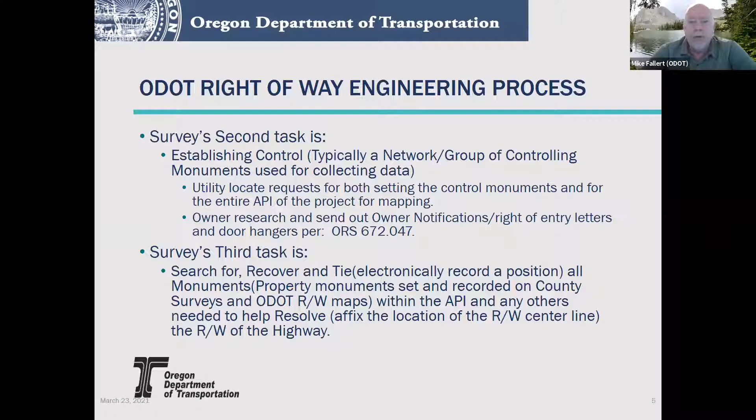So the crews in the field, which are very critical to our process here, they go out and they search and recover or tie, electronically record the position of all the monuments, property monuments, set and recorded with county surveys, ODOT maps. All this was within the API or outside of the API, whatever it takes that's needed to resolve the location of the highway center line. And then they're also collecting all this topography data, which moves on to the fourth task.

So while the topography data is being collected and the crews are out there doing that, usually have them do the monument stuff first if we can, because then the project surveyor can start working on all the information trying to resolve the right-of-way. Resolving the right-of-way is not always simple. There's tons of research, hours of drafting property lines, looking at every single deed and description, recorded surveys, county surveys, and the old right-of-way maps.

And so you try to put together all the information. You physically put all this together and use the monuments, physical features of the road, and then you have to also look for blunders in older data, because we may be retracing a center line that's 50 years old or something. But once that's completed and we've got a best fit resolution of the right-of-way center line, then we establish and lay out the existing right-of-way lines. And we draft all that up and put that together with all the deeds and maps and records of evidence.

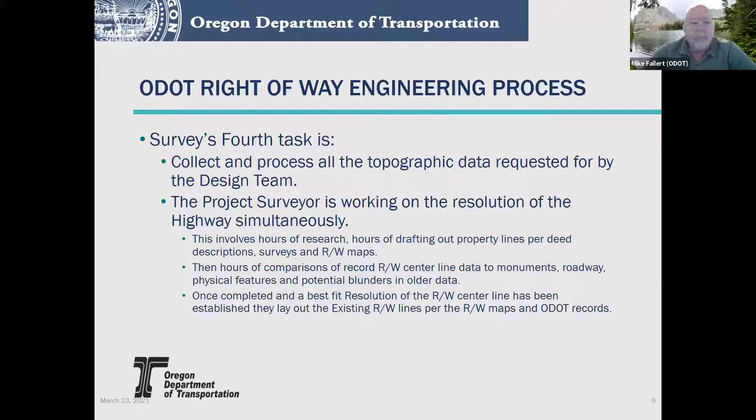So after this, the fifth task comes in for Oregon and for ODOT, and we create what we call a control, recovery, and retracement map, a CRR. What this does is it has the control that we set and its accuracy, where it's at, what it is, and all the recovered monuments that we found. This is per ORS also. And then we give the boundary lines, our widths and the location of our property. And then we show, to the best ability and accuracy without surveying every single property, the property sidelines of the vesting owners that are adjoining our right-of-way or corridor.

So the map contains control, monuments, a narrative of the evidence and why the surveyor put the road where it is, and of course the right-of-way widths. And once the topo map, the base map, is complete, then we reference that in and show all those features too. So both of these products that the survey creates initially become the base for the right-of-way engineering product.

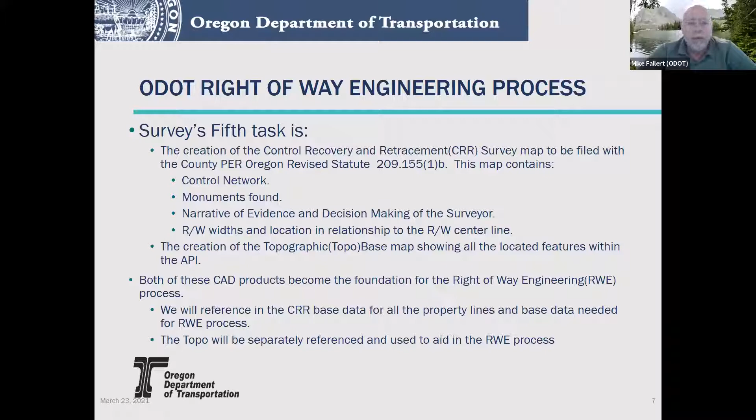So the sixth task now is we create a new CAD file. And we always want to use the seed RW2D DGN, and it's on the ODOT workspace. And this is very important. It wasn't so much in the past; people would kind of plagiarize other ones and bring it forward, blow stuff away so they didn't have to start over. But with the way MicroStation and the CAD programs work, there are certain things that are embedded or updated in those seed files. So you want to make sure and get a clean one each time so everything works correctly.

So you name it according to the standards, which right now is ProjectWise standards. And so you'll have a key number and all the things that you have for that. I'm not going to cover that because it's in other documents. And also the name of the map has changed, like we talked about, after 100 years. The Right of Way project is the name of your map. That's not the name of your drawing, your DGN that goes into ProjectWise. You have to have your specific ProjectWise name.

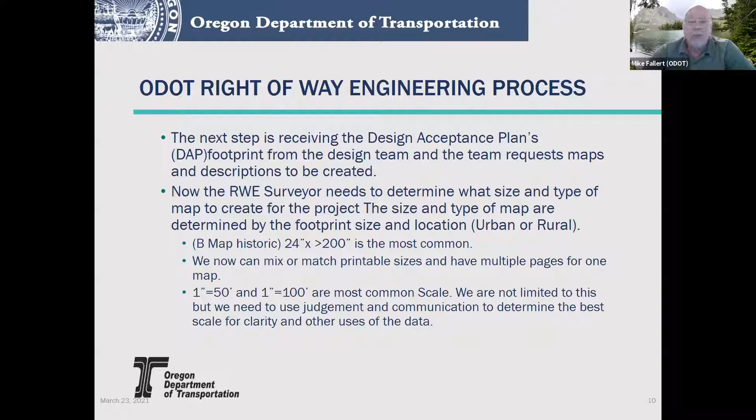Once we have that, the Right of Way Surveyor determines the size, the type of map to create for the project. And you determine what the footprint is, is it urban, is it rural? Do you want a roll map, the 24 by over 200? Do you want to mix and match? What scale do you want? Inch 50, inch 100, how much detail? So all these things go into determining what you're going to start out with for a direction.

And like I said, with the new map format we just talked about in the other slide, we can mix and match as long as we've got all these borders in there, and you create PDFs and combine them for a final map when you send it in. Here's the models within our RW2D seed. The ones that you don't use in here, like if you don't need Forest Service, Railroad, BLM, those sort of things, it's kind of nice to clean them out once you've established your drawing, just because you don't have to go look through and try to figure out which one has your stuff in it.

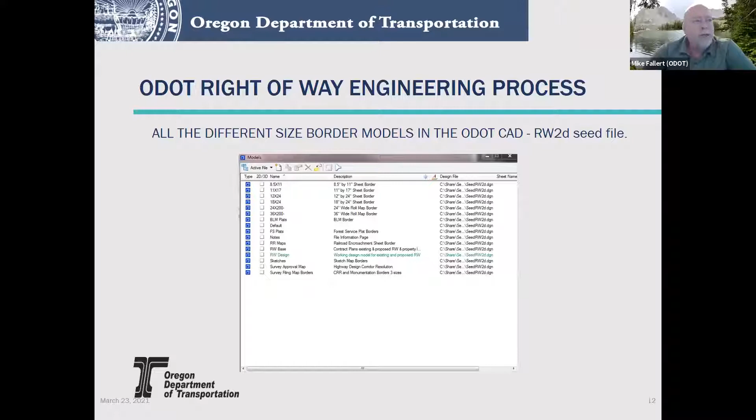And note also that this process or procedure may eventually change with our upgrade to ORD. So currently this is how it's working and will for a while, but there may be some process changes as far as referencing and drafting models versus sheet models, that sort of thing. So I won't go into that, but for right now, we have all this here. Everything is laid out and set. They're all cells. They're all at a 1-to-1. So when you set your scale of your drawing model, it will scale with it, drop it, and go to work. Okay.

So first thing in our process is we reference in our CRR data. Now, it may be my own data if I'm the project surveyor, maybe someone else's data that did the retracement or did the resolve. It may be completed and filed with the county, and it may not be. But these are the base right-of-way lines, and these have been given to the designer prior. Now we're just bringing them in for our design for right-of-way engineering. We reference it into the right-of-way design model that's in the seed.

We also then reference in the topo base model, and we give it a name of existing for ODOT. And what that does is the pen table recognizes that word exist, just like the roadway designers and others do. And it will grayscale the topography information back, as it's talking about there.

Now, one thing, many of the control recovery maps are done in an inch 100 because they don't need the type of detail. Many right-of-way engineering maps are inch 50 because they need more detail. So this is not a big issue other than some of the text that may come through from your CRR may need to be scaled, changed, moved, all that because of the annotation.

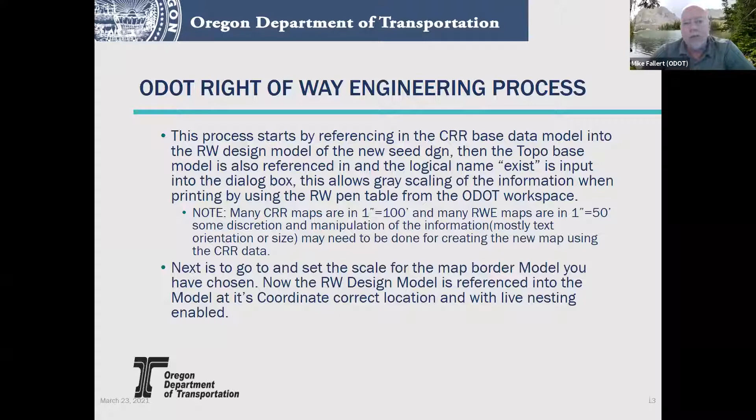So next, go to the scale, set your map border in the model you chose. Now, once you figured that out, reference your design model in and get kind of a basic layout and see how it's going to look and what you want to use as far as a border. You may change it a couple times to decide.

All of our map borders, like I said, are 1-to-1. Their origin is at 0-0. So when I bring it in, you bring it in. So these are just kind of some tips and tricks and probably a little more technical than some people want, but it's just stuff we threw in there.

You start beginning your design process. You're going to orient the highway. You may need to rotate this, 90, 110, decide what it is to fit based on the type of border you want to use. The length of the project, the lay of the project, is it a big intersection? Are there a lot of curves? Stuff like that. And again, as we talked with the other one, is it east, west, north, south, changing directions,

stationing directions. You will find some maps that are upside down because they ran the stationing the other way. And so north will actually be on the bottom of your right-of-way map. Watch for that. Very few, but there are some out there. And then also, whether it's urban, rural, all these factors come into how we are going to lay this out and what is the best way to do it.

So after you've done this, I'll bring this up again, not to beat the poor horse, but please send in a map creation request or notification to Maps and Plans so they can get a placeholder in there.

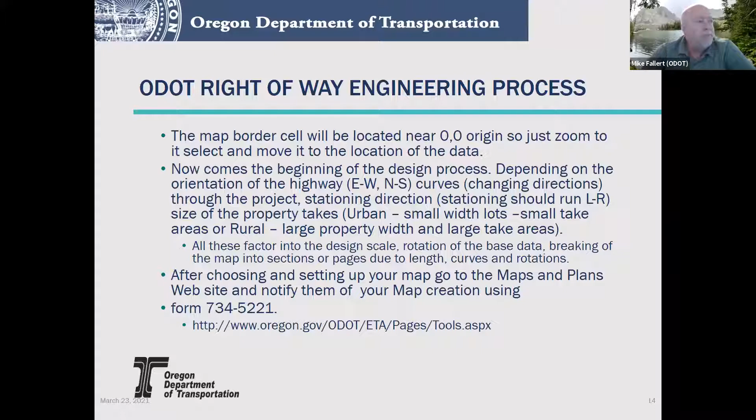Hey, Mike, got a question. Yes. Does the project surveyor have any say on where the new alignment joins the historic alignment in the DAP? And if not, why?

Yes, so in Oregon, the requirements are we resolve the center line based on the historic. Unless for some unforeseen reason we use a different center line, typically we'll use the historic center line and retrace it, and basically we perpetuate that forward in time. The designers then, with their roadway alignment, at some point on both ends need to tie in to our historic retraced center line.

Now, if we're doing a realignment, then that's a new alignment, and we would use the designer's construction roadway center line or a ramp or something like that. I have seen one which Wayne Donovan knows in Lincoln City, and Kevin had, where someone changed and there were like 6 different alignments on 5 different maps. And basically the end result was, we're going to use the new construction center line because it's a hodgepodge and it's all messed up. But they do and should tie together at some point on each end.

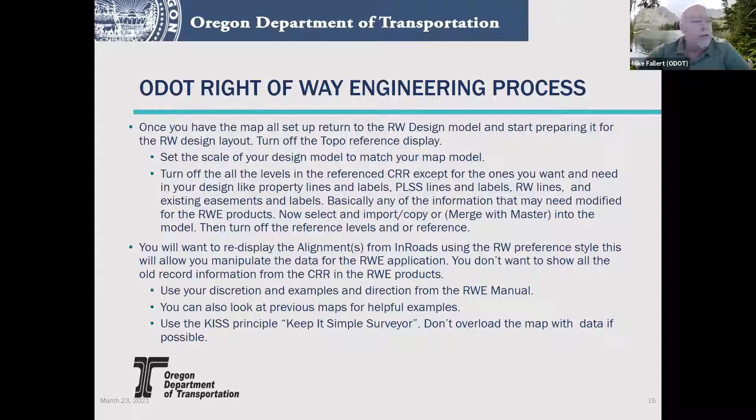One thing that we always say is the KISS principle, just keep it simple, surveyor. Don't overload the map with data if possible. Make it nice and clean, legible if you can.

So now design has come in, the DAP, the roadway designer, has given you his base DGN location. And so you should have all the design elements, including your slope lines, cut, fill, pipes, drainage facilities, all that stuff. So work with your designer to understand the right-of-way needs, because they're going to be in close conversation with each of the different disciplines and right-of-way.

And they're going to say, well, here's a pond or a slope line or this or that. And they say, traditionally, I think we need 5 feet past it in order to maintain that for future use, or 15 if we're in a rural area, so maintenance can mow or do things. So they might draft in there and say, this thing just needs a permanent easement, this needs fee. And so they may draft their ideas in there, but it may not be perfect as we would want it.

I don't say that anything against the designers, but right-of-way surveyors, in the state of Oregon, are the only ones that can, quote, lay out property lines and boundaries. So if we can, we try to get even stations, even offsets, minimize angle points as much as possible, put event points at PCs, which we'll talk about too. And so ultimately, the actual layout of it is up to the right-of-way engineering surveyor.

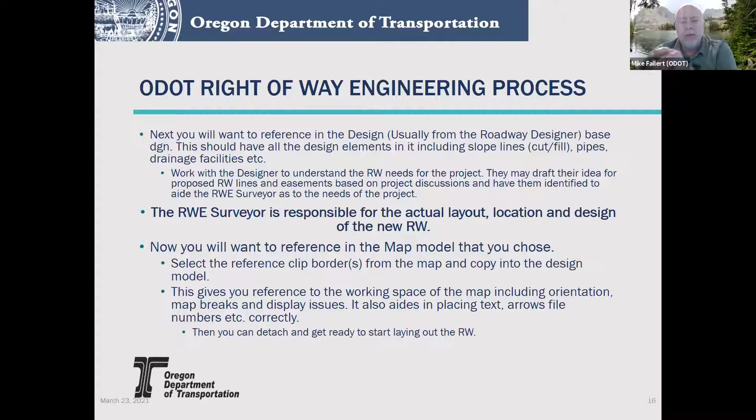Then you decide to orient it, if there's multiple pieces, and you lay that out there so that when you start doing your design and layout, you know the orientation and how it's going to look, whether it's going to fit inside of that clip border or not. This gives you a reference for orientation. Then you can detach it, because you've got that in there now. It'll come back in because you're going to reference that back into the map model, and that tells you where to move the right-of-way and clip your reference for printing.

So, all right, these are all technical things. I hope I'm not boring everybody. It's just how we've laid this out, and these were things that we thought would be good to pass on just as an overview.

So at this point, we've got design, we've got our initial layout, we've got an idea. Now is the time when we want to schedule what we call in ODOT the right-of-way layout meeting, because sometimes that could be 2-3 weeks away, just depending on the project and how large or small it is.

And at the right-of-way layout meeting, we have now proposed all these right-of-way layouts, all those files, angle points, easements, all these other things. And it brings together all the stakeholders in one room, including construction, maintenance, all the disciplines that are involved, the roadway, right-of-way, all these things.

And basically, file by file, we go through every file, every angle point, every slope line, all these things. And basically everybody agrees that, yep, I think we're good to go. And so, okay, now we've got it, everybody agrees with it, we can start putting it all together. So once that's finalized, you're good to go.

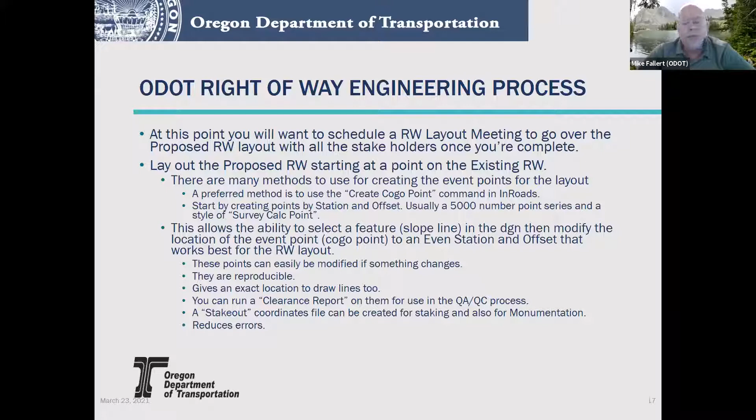So it reduces errors, and it's a one-time deal that you don't have to go back and recreate them time and time again. So that's just a preferred method, technical thing. We talked about event points. When you're laying out right of way and you're looking at this, try to minimize angle points. Like I said, you want to keep monumentation in mind. You want to try to use event points that are existing, PCs and PTs, equation stations, stuff that's going to need monumented anyways. And that cuts down on having, which I've done before, a monument 5 feet away from another monument. It's like, that didn't make sense.

So also you want to keep in mind, per all the other requirements, we're supposed to minimize the take area when at all possible. We only need what is needed for the project, but we need to keep maintenance in mind, staking in mind, land value in mind. So the project needs, basically. So there's a lot to think about.

Also, to aid in laying this out from sitting at the desk and all the other things, use the existing topo, geo-referenced imagery; street view has been amazing. Also, within ODOT, we have the digital video log, and also the, Audrey, what's the name of Chris's program that you can measure with the point cloud? The virtual highway corridor. Virtual highway corridor. Okay, sorry. That's one we need to probably update in there too. So we have a lot of tools to use with that.

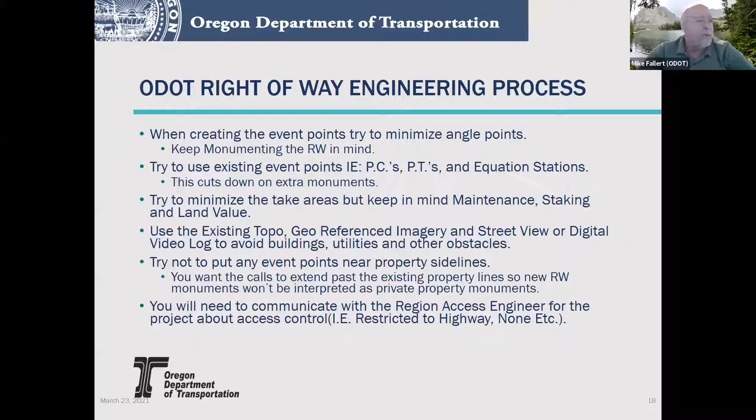So when your event points are complete, one of the things that I do, on a default or a number level, something that you can turn off or blow away that nothing else is on: draw perpendicular lines to the center line and extend them out. And what this is for is the alignment of your text for your station and offsets.

So I do that first, get my text in there, whether it's going to be your fee text or your easement text or your offset text, those sort of things. They're easy to turn off or delete when you're done, and you can slide things in and out, keeps everything lined up.

Another good thing: place your first text, get it pointed forward. If you think you're going to need masking, which is kind of fading out or closing out the background behind the text to keep it a clean look, I like to do that first with the very first one, because then I'm going to copy and move it forward and I don't have to do it to a whole bunch of them. It's already done. So that saves time.

So now when you're confident with all this, everything's going together really good, now you start creating your shapes. If you got tangents, it's easy. You just go boom, boom, boom, create a shape. If it's a fee or an easement, make sure you got the correct one, and the shape, make sure it's a shape. Change its color.

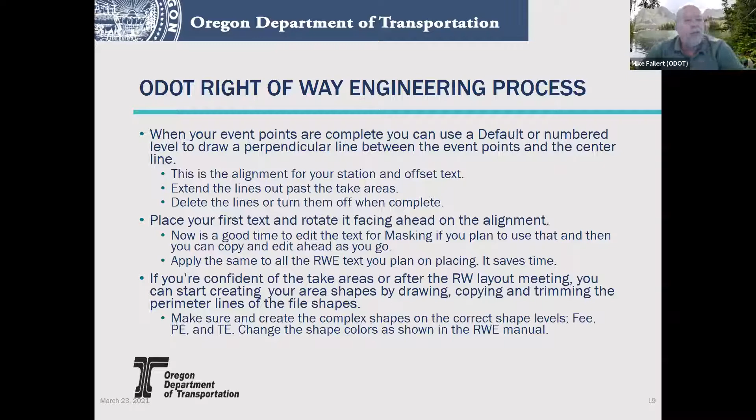You can make it as rainbowy as you want, as long as each one next to each other is a different color and it shows up good. So if you want reds, yellows, blues and greens, and what order you want to put those in, that's really up to the right-of-way engineering surveyor. But just make sure that they're put in there. So you get all that together.

Then once all that's finalized, it's all labeled, you start working on the aesthetics, which I call the look and the feel of the map. You rotate your text, you move the text, you mask features and lines, remove or add data, spell check your drawing. You look for overlaps and gaps, things that are poking out here or there.

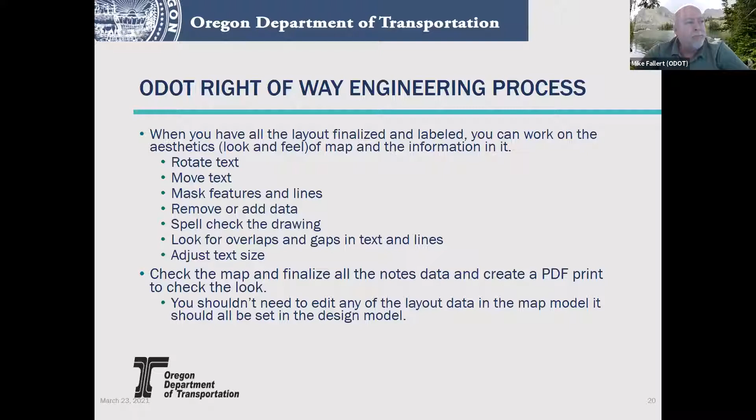Adjust your text size. I always print to a PDF, because you got a white background now. It's a good time to check and look for errors, have someone else do peer reviews, that sort of thing. And then you shouldn't have a lot of editing because you already laid everything out in your design model. So it should be all fitting, and you had your border.

So now, one key thing here that has been a point of discussion, how am I doing on time? I'm getting there, okay.

As you notice in this process that I've laid out here, the map is first. The map's always first. A sketch map started out as: take the big roll map, stick it on top of a copy machine, and scan the piece you want. So a sketch map is only supposed to be a snapshot of the big map. So it should have the exact same data, look identically the same. It shouldn't be drafted separately.

Why would you want to draft it separately? All the information is on the big map and you've done it once. So please create your map first, get everything the way it should be before you ever go to sketch maps or go to write a description. And I also will state again,

If a description comes in to ODOT headquarters, region, whichever, it has to have a map, and the map has to have information, everything about it. I will say one caveat, and that is on small projects that only have temporary easements. There is no map created for those.

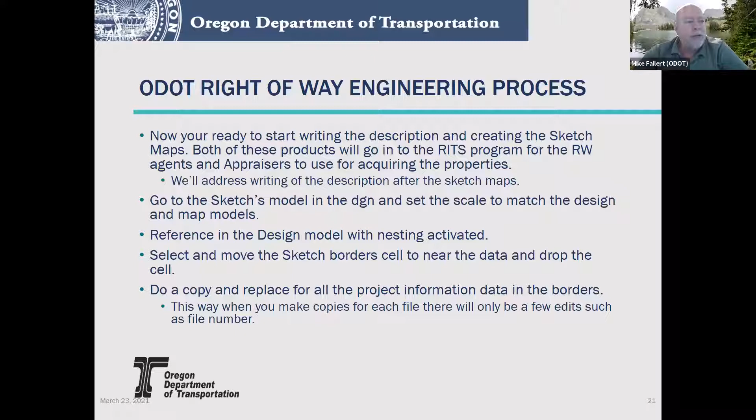When you get there, first thing to do is find and replace and put in all of the project information into the borders, so that you don't have to do it later, because you should only have to change like maybe file number or certain little things, but you don't have to type the file information on every single one as you copy it over if you do it the first time.

So the first thing you do is you take that border that you want for the sketch map. 8.5 by 11 is your typical size, but there are other sizes. Legal, which is not used much, and ledger, which is 11 by 17. There's both landscape and portrait sizes there. You can have multiple pages if you need it for a single file, if it's a large file. Anyways, you move it over file 1 and you clip that reference, and there you got the start.

Each one of the files on larger projects, you'll have individual sketch maps, which will be individual borders, individual references for all of them. Smaller project may only have one. If it's 3 or 4 files and they're all clumped together, you may use the same sketch map for all 4 files. That's been done before too, so that's acceptable. Work with your agents, work with your regions.

Now, one thing that I was taught to do, some people do, some people don't, I do kind of like it, is grab the file shapes for file 1 that are in your reference, copy them into your model, your sketch map there. Then you can turn off all the other file shapes in the reference. This allows file 1 to be the only one when it's plotted using the pen table to have any color. So the neighbors, all the information's there, they're not colored. So that sometimes helps bring out that emphasis.

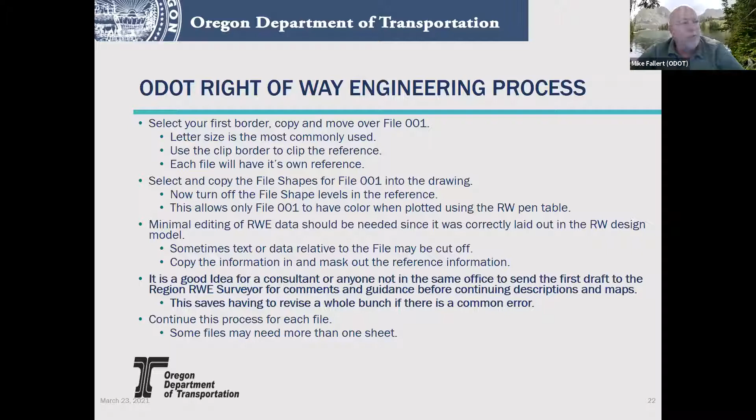Okay, writing descriptions. Hey, Mike. And everybody struggles.

It looks like we lost Mike. Oh, I wasn't sure if it was Mike or me. I think it's Mike on my machine. Must be, yeah. He just, oh, is he back? You're on mute, Mike. All of a sudden, everybody disappeared. Sorry, I thought it was me this time. I don't know. Well, okay. I guess this is a good pause for me to ask a question.

Okay. We had one question: what is the standard scale for those sketch maps? Sketch map scale. Well, there's not really a standard scale for the sketch maps. You could adjust them as long as the information is legible. But if you change it from your design scale, if you have inch 50 and change it to inch 100 or something else, your text will probably be all wonky.

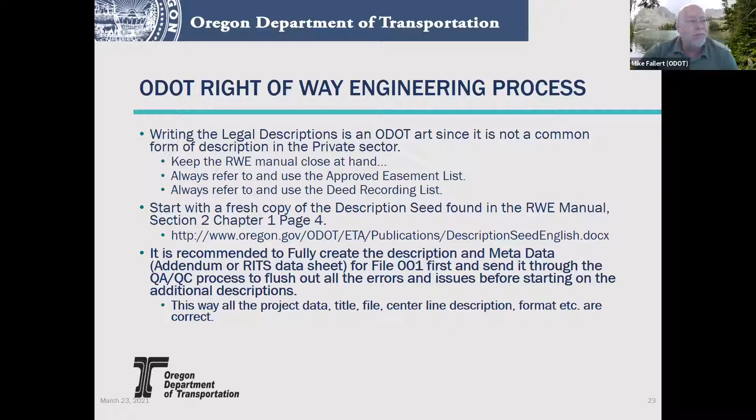Okay. So final descriptions, all ODOT descriptions have to go through, no matter what, the region right-of-way surveyors, and they have to approve all the descriptions, sketch maps, and map. As far as I know, there is no exception. ODOT has to approve them. So they can't just be put into RITS without approval.

And at this point, I think the regions or others within ODOT, we upload everything into the RITS system. But anyways, everything goes through the right-of-way to make sure it's correct. And then this is supposed to be a funny. So now the right-of-way surveyor waits, and a statement has always said, now let the revisions begin, which means we've turned them in final. We say we're done, but stuff happens.

So many of those revisions come from different reasons. Design change can sometimes be one of the biggest. Something happens and a design needs to shift or adjust or change. Owner negotiations, settlements, legal issues, those sort of things. So if you need a revision, follow the process outlined in the right-of-way manual, RITS workflow requirements.

But once it passes the approved stage in the right-of-way headquarters in the RITS system, and is put on the OTC agenda, it becomes a formal revision. And it has to have a formal revision request. And that document explains why or what that is. And they actually do a report to the OTC on the amount of formal revisions.

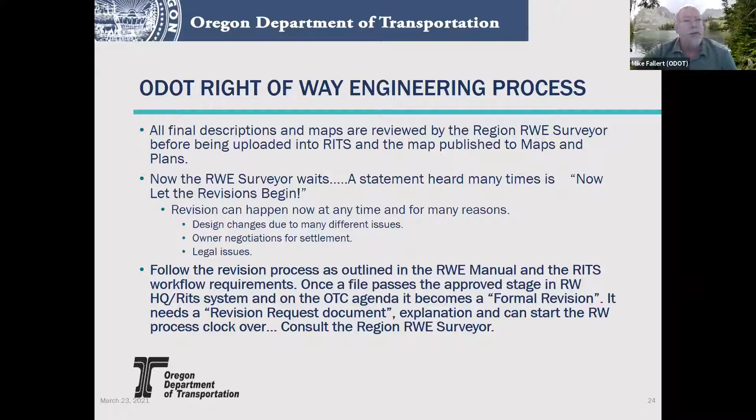I know we're all under the gun. I've been in the production side of it. I know what's there. I don't see it as much anymore until there's problems, but it's out there. So don't get in a hurry, because I think it's a 40-day clock or something like that that could start over, which then just bogs your project back down again. So anyways, try not to get in a hurry.

Okay. So now after all this, everything's moving on, and you're getting towards bid let. Another part of the deal is that your right-of-way surveyor and the right-of-way manager or survey manager should have a monumentation estimate prepared and ready for the bid let team that says, hey, when this project gets done, we've got X amount of dollars we need to have in the project for us to monument it. So we want to earmark our money, because this needs to happen. And so they put that in.

So once all the acquisitions are done and it's closed and recorded, then the right-of-way surveyor needs to deed record the map per the manual, like we showed. I've heard that maybe this isn't happening lately, but the regions need to get with their construction offices. Typically when second note is issued, meaning all on-site bid items are complete, the construction office will notify the right-of-way surveyor or the manager that second note has been sent on this project. So that's basically saying it's almost done. Just got to do the final cleanup, get ready for third note.